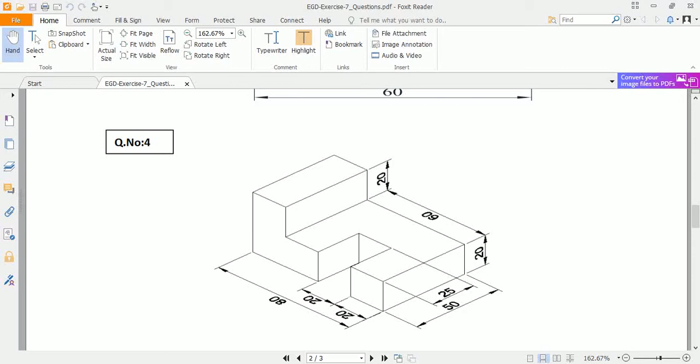This is a typical question where you have a base block with a bit elevation of 20mm. So first we'll start with this figure.

How we'll start is set the units, make the precision to 0, and the insertion scale to millimeters, after which you just check whether it is in 3D modeling or not.

Then straight away we can start with the top part. In this figure also we have to start with the maximum dimensioning area, which is this one. So first we'll start with the base part.

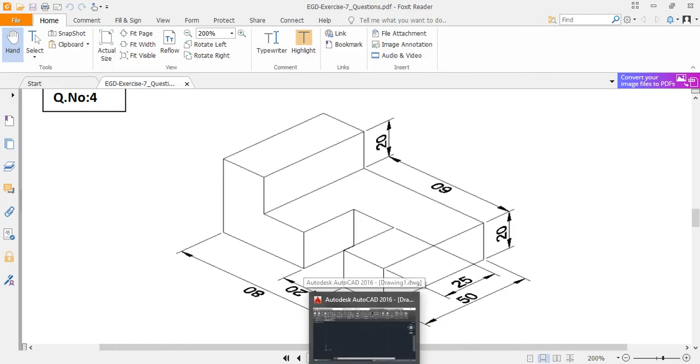So the total length as per the given figure is - make sure the ortho is on. Draw a line length of 80mm.

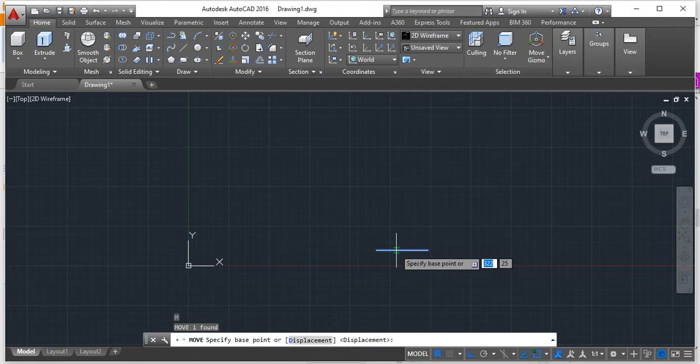After which, this 80mm line, I'll just try to move it some other place in order to ensure that the line will be made properly.

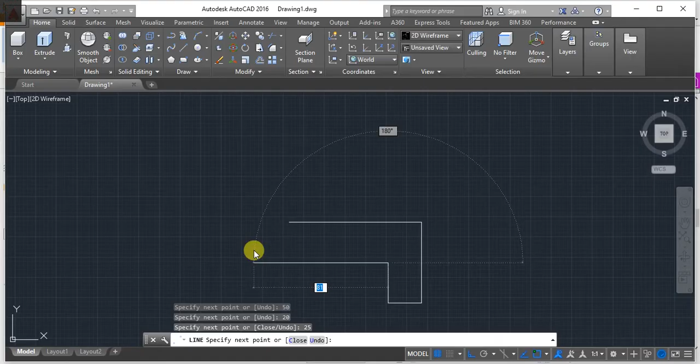Then the vertical length would be 50, so we'll start with the vertical length, which is 50, after which this length is 20, then the internal depth part is 25, which is already given here, then this length would be again 20, then the vertical length would be again 25, followed by the rest of the length, which is 20 plus 20, that is 80 minus 40, which would be 40 here.

The vertical line should exactly join this point, right? So this is the bottom part. After this you create a join so that all the lines would join and create a single entity.

Then create a region, so this would be the region part. So when you just click on this, shades of gray, it should look like a plate. So this is a kind of mark where you have to work on.

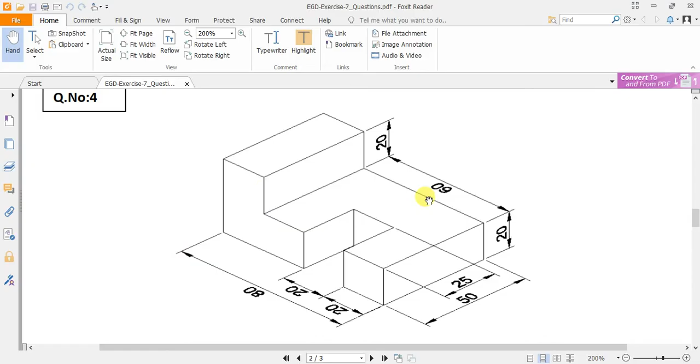After which we have to work on the height, which is the elevation part, which is given as 20, after which we will be making this region. So first we start with extrude, click on extrude, select the region, and then it would be extruded for 20mm. So when you just click on the 3D part, it would look something like this.

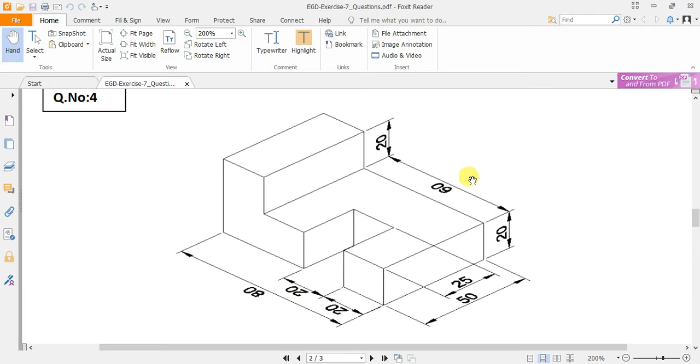So switch to the top view again in order to start drawing the rest of the part. Draw the vertical line from here to here, then this length in the figure is given as - here it is 60, so the rest of the region would be 20, so make it as 20.

Just ensure there are no overlaps. So draw a vertical line from this corner, or you can just switch to 3D and then also you can draw.

So from this corner you have to draw a line of total length, which is 50, followed by 20, then the vertical line would be the same length, then join this region.

After this you create a join command so that you join all the regions that you have drawn. Then after that region command, so this would be the region, given enter. Then try to extrude this part alone with a level of 20 again.

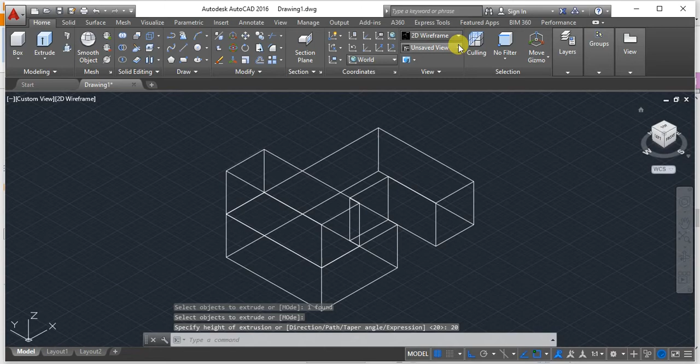Okay, so once it is formed, you can just visualize there are two entities. You can use any typical thing - I am just selecting conceptual in order to make sure the shadows are made properly.

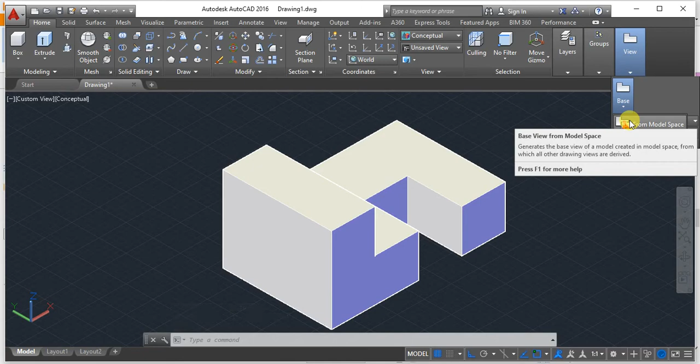After this, use the command union, after which select the first and the second blocks in order to create a region like this. So this part you can straight away extrude and then make it a 3D figure, and then just share it onto the layout part.

Here you have to make the necessary things. So what would be the necessary things that you can annotate here are: the very first region is this thing, which is 50. Use dim style.

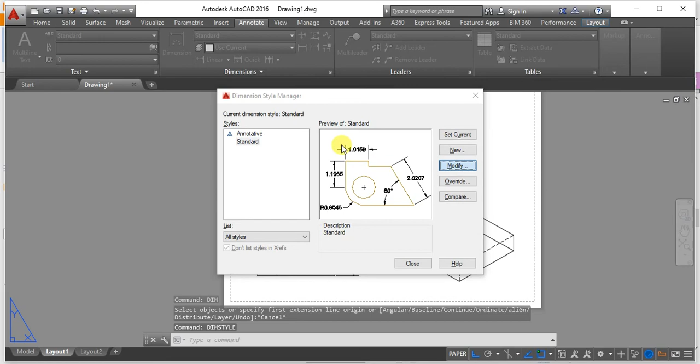So that there won't be any overlappings, just modify, make sure it is 0, then just set current, close it. So it is 50 here.

Click on the linear part. You can annotate this region, which is 20, followed by the depth region. You can annotate here. Make sure there are no overlaps of the dimensioning part.

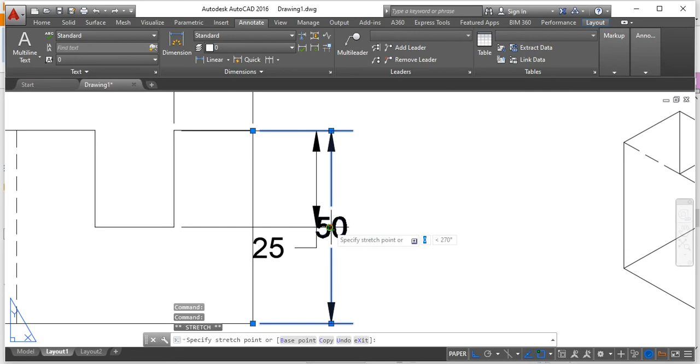Then this region, which is 20, followed by this region, which is again 20 here. Just make it internally. Then this total length would be 80.

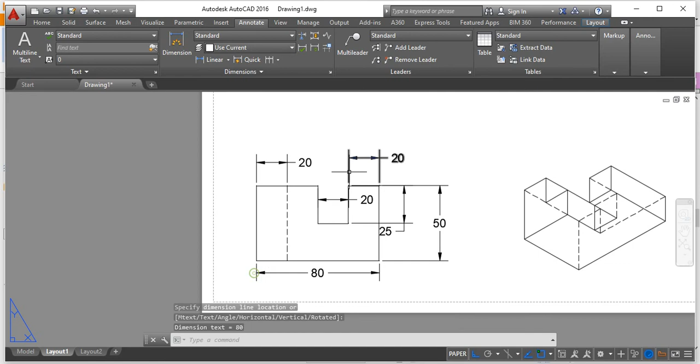The elevation part alone you have to make it here. So that is from this part to this part, you can make it here.